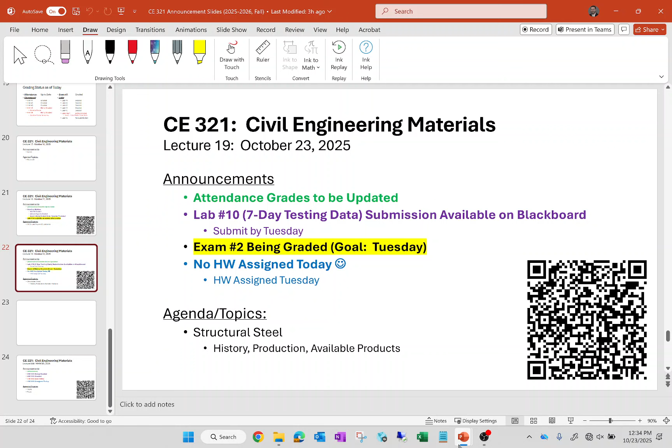Steel is a definite area of passion of mine because I've been a structural steel researcher basically since I was in my early 20s. I've been doing this for a while. I could talk about steel all day long, but I'll try and restrict my discussion to the key bullet points. So I'll talk about the history of steel a little bit and how it's produced. But mainly I think you need to know the context, and you need to know the products that are available. So let's talk about steel.

Steel is an incredibly common construction material. It's probably our third most commonly used construction material in terms of weight and volume, because concrete and asphalt, obviously, we just use higher volumes of those than we do steel. But steel is one of the most versatile materials that are out there.

One thing that's a little different about steel, at least from an engineering specification standpoint, is that concrete is a material that's designed. Soil, aggregate base, asphalt, etc. - those are materials that are designed and specified. Steel, not so much. You're just sort of buying it from the supplier. So really what's most important is that you understand steel's properties, and that you understand the products that are out there. It's not like concrete where we need a long discussion about how to proportion a mix design. You're just picking what's available from a manufacturer or a supplier.

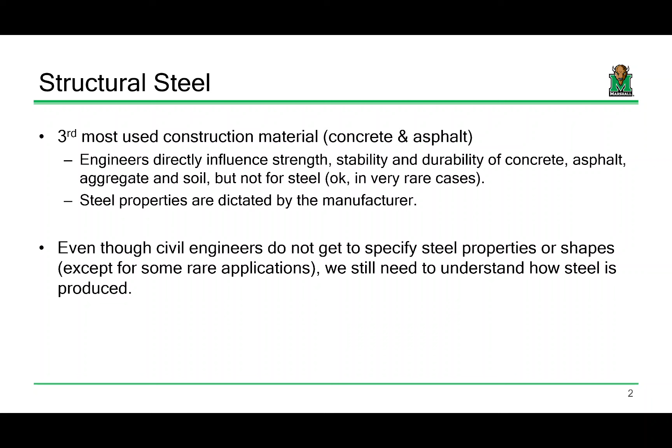So why steel? Why would you use steel for a given project? Number one, steel is an incredibly strong and stiff material, with a really high strength to weight ratio. Steel is a really heavy material - we talked about how concrete weighs usually on the order of 140 to 150 pounds per cubic foot. Steel weighs almost 500 pounds per cubic foot. If you have a cubic foot block of steel, it weighs 490 pounds of structural steel. That's heavy.

So steel is definitely heavier than concrete, but for that order of magnitude increase in weight, you get an even higher order of magnitude increase in strength. So even though steel on a per cubic foot basis is heavier than concrete, because it exhibits so much more strength, steel structures are lighter than concrete structures. If you look at a structural steel building frame, like this building we are in right now, the frame is a structural steel frame. If this building were made out of reinforced concrete, it would be a much heavier building.

There are a number of real considerations that you need to account for when selecting materials like that. For example, the heavier the building, the beefier the foundation support structure needs to be. The heavier the building, the more it can affect the dynamic characteristics of the building, which can be important in earthquake-prone zones. That type of thing is stuff you need to take into account.

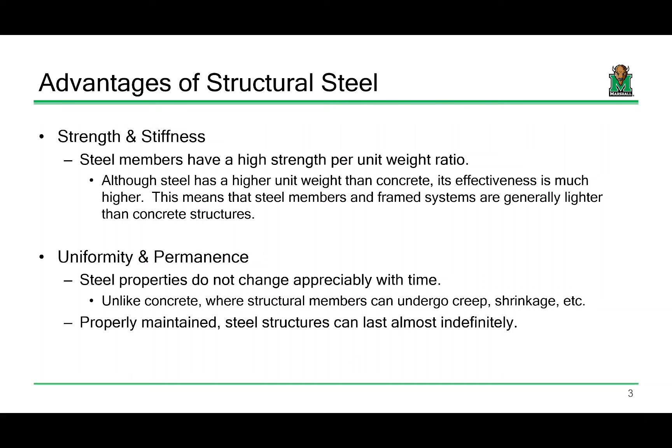So you don't really have to worry about time dependency. From a material standpoint, steel is a pretty easy material to design with. It's also an incredibly ductile material. Ductility is a characteristic we're interested in whenever we need to design systems where we expect a lot of inelastic deformation - building design for earthquakes is a big example. One reason we use alloys like steel in car frames is that under car crashes, we can absorb a lot of that energy into the steel elements, having the steel absorb the damaging energy and not the person. So steel works very well in that regard.

Nowadays, I'm going to talk about the two different ways that we produce steel, but nowadays steel is surprisingly sustainable because most of the steel we produce for the construction market is recycled. We're not actually producing raw new steel like we used to - we did, obviously, but now what we're doing is melting old steel and reforming it into new products.

About 98% of the steel in a building can be recycled into new steel, so we're really able to stretch that quite a bit. There's a term called mini mill - nowadays we're melting old steel into these mini mill operations. All we have to do is change the chemistry a little bit, and boom, we've got a new product.

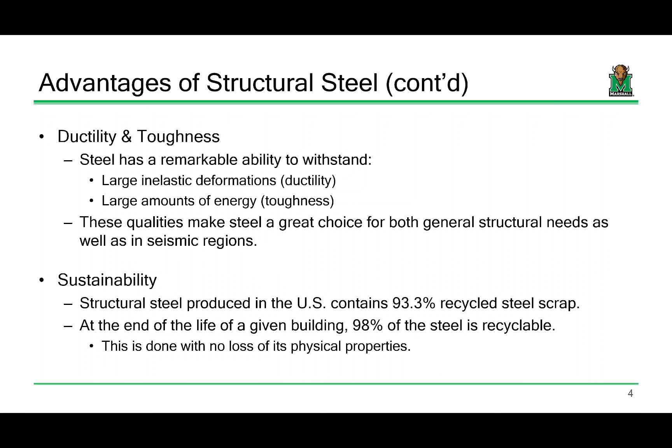A little bit on the history of steel: it was first used in Europe. This was a railroad station in Paris - this was the first really major use of it. You saw it used in Paris and London. There was a pretty famous structure built in Paris, which I'm going to show some pictures of here in a bit.

One of the things steel did is it allowed buildings to be taller, because it has a high strength to weight ratio. Steel is one of those materials that allows buildings to get taller and taller. But for a long time there was sort of a ceiling - a point where we weren't going to build anything of significant height because we were waiting on a particular invention to make tall buildings much more effective. So what invention do you think really made tall building design possible?

Ladders? You're on the right track, but that's not right. What is a ladder used for? Getting up to height. Okay, so what's another way you can get up to a higher floor in a building? An elevator, right?

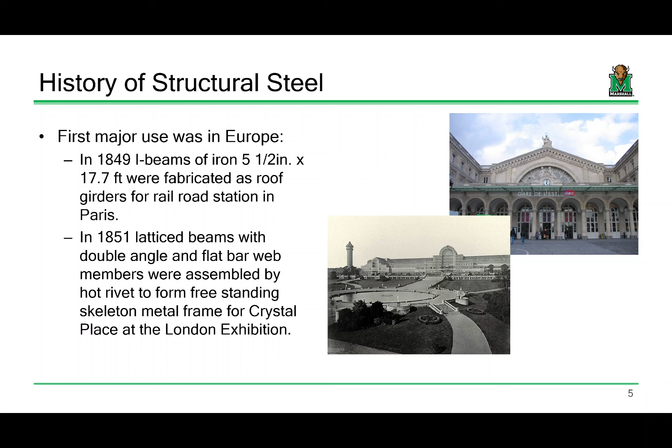So what you found is that in America, around the 1880s, you started finding tall buildings being erected. The first tall building was in Chicago - it was the Home Insurance Building. In 1890s, Chicago was really famous for its high-rise steel buildings. In fact, the American Institute of Steel Construction is based in Chicago - have y'all seen the Steel Manual kids carrying around? They publish it there in Chicago, so they kind of have a home there.

But really, it was the elevator that made tall building design effective. Once you had an elevator, you could start making buildings really tall, because now people could actually access the higher stories and not be exhausted going up the stairs.

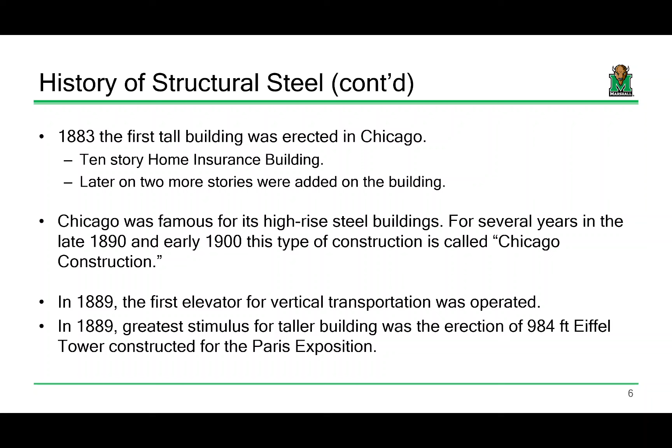Things got a little nuts in the late 1800s when this thing got erected - this guy named Kyle right there, he's a dork, that was me in grad school. That's me at the Eiffel Tower. That thing is massive, I don't know how to characterize just how big this thing is.

It's insane. I don't know if you can see this, but this is me really zooming in on some sections of the tower - see these folks right here? I was in Paris, and there was some big summit, like a G20 summit, with dignitaries and foreign ministers and secretaries of state from various countries meeting in Paris at the same time I was there. So they had all these French federal agents scaling the tower, making sure there were no incendiary devices or anything like that. It was kind of nuts. I wasn't there very long, only for a couple of days, but...

It was a great trip. If you ever get the chance to go to the Louvre, go to the Louvre - you get lost in that place, it's huge. But that was an interesting juxtaposition.

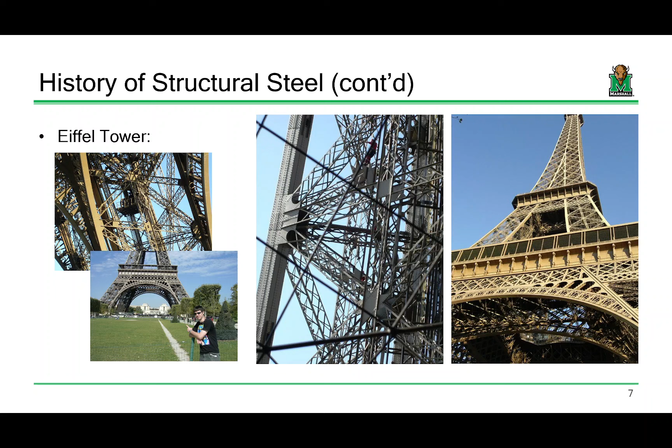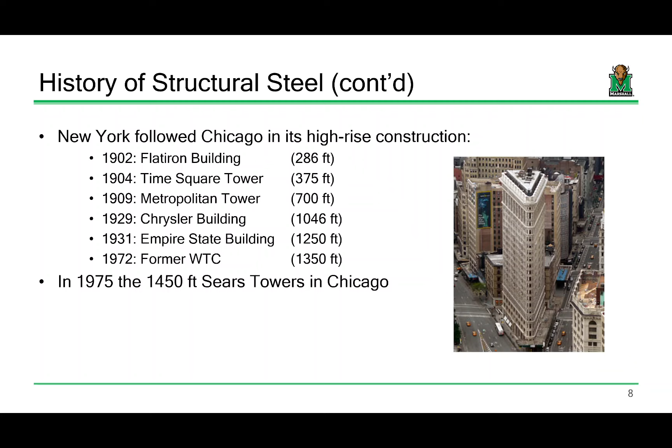So after that, New York started to say, okay, we can build tall buildings too - you've got the Flatiron Building, Times Square, Chrysler Building, Empire State. In 1975, the Sears Tower got erected, now the Willis Tower, and you can take it from there.

I don't want to say much more about the history of steel, because what matters more is the production of steel. There are two approaches we use: the basic oxygen furnace approach, where we generate raw steel, and the electric arc furnace approach, where we're melting old scrap to turn it into new steel.

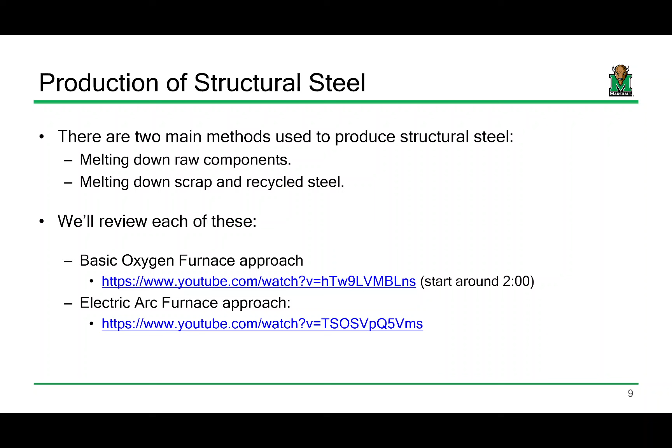The steel making process is essentially feeding in three raw materials: iron ore, limestone, and coal. The coal generates the heat necessary, along with the carbon content, to generate your raw pig iron, which you can then cast into steel.

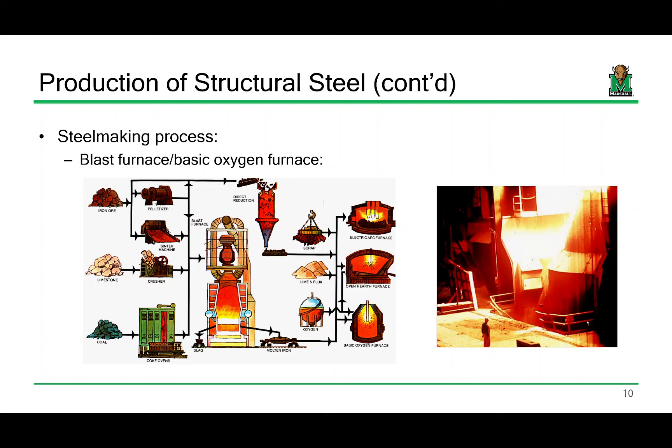If you ever get the chance to go on a tour of a steel making facility, it's really worth going, because it's wild what they're able to do.

That diagram distills this into a three-step process. We reduce the iron ore to pig iron, then we take that and refine it into steel. I'll show you some of the additive compounds we use to adjust the chemistry of steel, like a table of how vanadium or nickel affects the chemistry. Once we have molten steel, we form it into products, and that product forming is what I want to focus on later.

Step one: we take the raw iron ore and heat it in a big blast furnace with coke and limestone. Each serves a particular purpose - the limestone shaves off the impurities in the mix. If you've seen steel produced, you get slag, and you scrape that slag off. That's where all the impurities go.

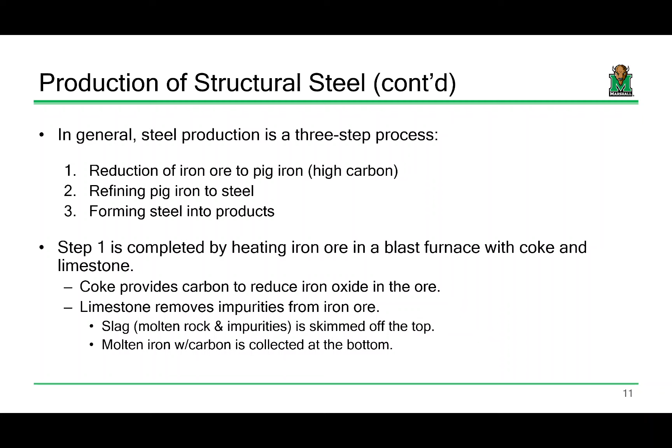The big thing when producing steel is you want to reduce oxygen in the molten metal - that's the one thing you really want to reduce. You also want to reduce hydrogen, which becomes more of a challenge when welding - we'll talk about that later. But getting that oxygen out is a big goal during production.

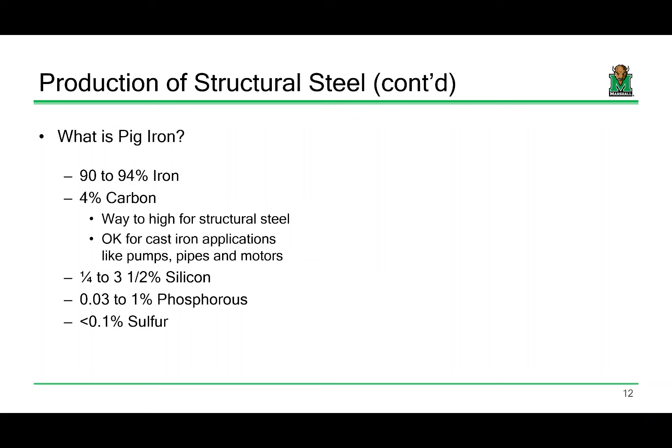Pig iron is mostly just iron with a little bit of carbon in it. You might find trace elements of silicon and sulfur, which are detrimental to steel behavior, but they're there - you just have to control them.

This process is what we do to control the metallurgy. This might seem counterintuitive, but we introduce oxidation into the mix to remove impurities. We also, in a ladle metallurgy furnace, control the chemistry of the mix by introducing things like vanadium, nickel, etc.

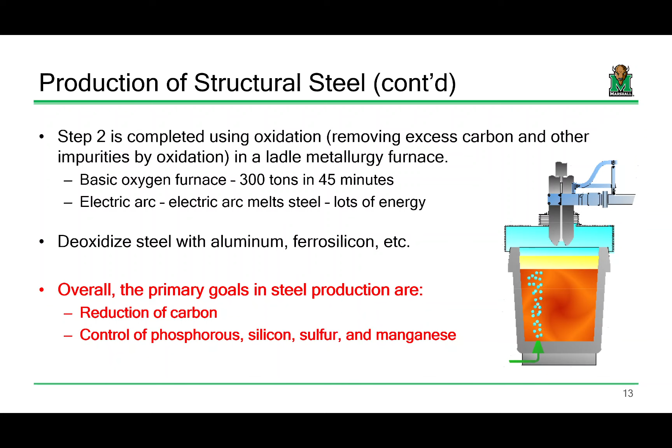One job I would never do is at this stage you have to collect a sample of the molten steel. There's a guy with a big flame retardant suit going and drawing this sample. I'm like, no, I'm not doing that - that looks terrifying, no thank you. I think that's in one of the YouTube videos I linked. But yeah, I'm not doing that, that seems very dangerous. It's probably not, but it just looks it.

In general, the steel process is done the same way, but there are variations of steel, variations of grades. There's low carbon steel, mild carbon steel, stainless steel, and all that. What really changes the grade of one steel to another are alloying agents.

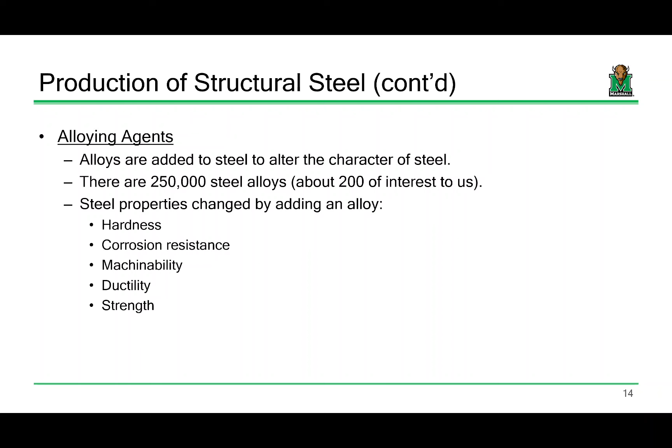Let me find it on this slide - there we go. If you ever go to a steel mill, particularly a mini mill, it's kind of shocking how small these piles are. I went to this mini mill in Muscatine, Iowa, and the steel mill was located right on a rail line. Rail cars would come in daily with carloads full of scrap - old cars, old construction equipment, railroad scrap, you name it.

They melt all this steel, taking different steel from all these different sources, creating a big melted pot of steel, and say, okay, we need to generate A572 grade 50 steel. This facility is like a mile long - it's huge, massive, twice the size of Marshall. And then you ask, okay, well how big is their nickel pile for the whole facility?

It's kind of nuts how little material they really needed in order to control chemistry. It's really kind of amazing. They literally had piles of aluminum to throw in the mix, a pile of copper, a pile of vanadium, and so on. Each of the different alloying components provides different characteristics of the steel.

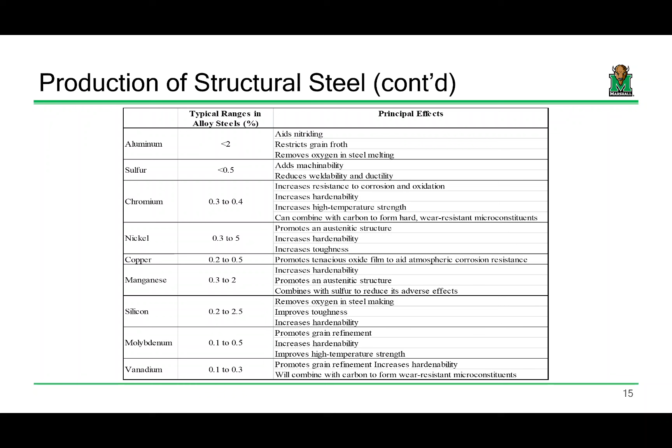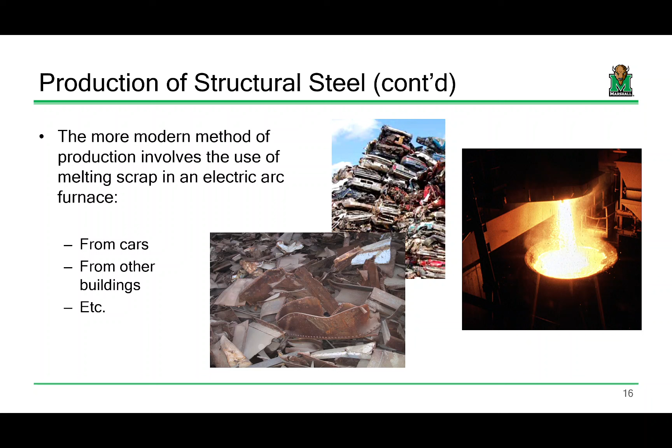The more modern method, which is really what I want to focus on because this is what you find getting done more and more often - I know the Nucor facility we're getting ready to build in West Virginia is doing this too - is melting scrap. That scrap can be things like other cars, other buildings, construction equipment, rail line, just any old steel. They take that and put it in a big electric arc furnace, melt it, and then draw a sample.

They draw a sample, check the chemistry, throw in a few alloying agents if necessary, and then begin the casting process.

One thing I thought was really crazy: I was at a steel casting facility in Iowa. In the casting process, you can produce ingots, which are discrete blocks of steel that can then be rolled into other products. You can also do continuous casting, which is a popular means of generating plate stock. The idea is that there's a continuous line of a slab of steel that gets produced.

What they do is, there's this ladle of steel. They open the bottom, the steel starts flowing out into a dish called a tundish, and from the tundish it flows into the mold. The reason for that extra step is so you get a continuous flow rate into the mold.

But the cool part is they have this tundish so you get a constant flow rate into the mold, but there's a gap, a section where the molten steel is exposed to air, and that's not good. For that little section where the steel is exposed to air, it's not like a volcano—it's flowing at a very slow rate.

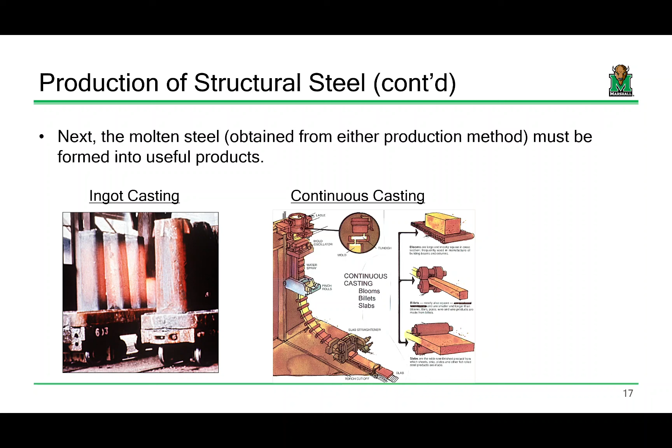Now, whether you have ingots or a continuous cast slab, what you then have to do is take that section and form it into a final product. I'm sure you've heard the term rolling steel, or a rolled product.

The easiest one to wrap your head around is a plate. So let's say you're forming a plate. You start out with a block of steel, maybe this thick, and you want to essentially squish it, almost like Play-Doh, into the thickness you're interested in. You run it through high-pressure rollers that squish the steel every so often until you get to your final desired thickness.

One interesting thing is that when you do rolling, you roll in odd-numbered intervals. The steel comes this way through the mill, into the rolling section. You want an odd number of rolls—let's say 5—because you want to roll it back, roll it, and then shoot it off to the next destination. You always want an odd number of rolls so it continues onward instead of going back.

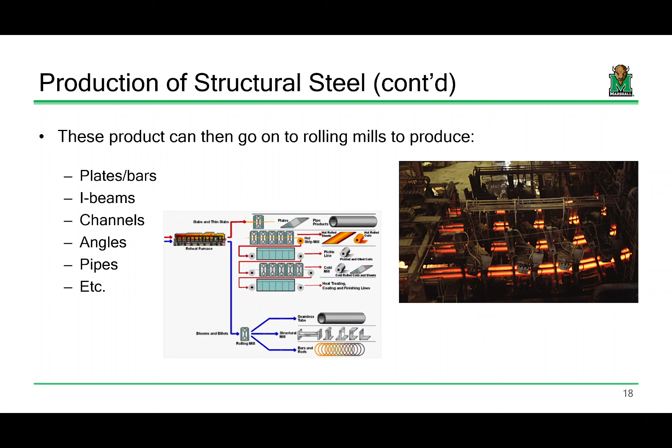You don't want the steel going back into the mill—you want it going out to the storage yard. So you always have an odd number of rolls. Plate stock is just taking that plate and squishing it down. If you're generating something like an I-shape, a channel, or an angle, you've got multiple rollers pushing it this way and that, squishing to generate an I-shaped cross-section or an angle, etc.

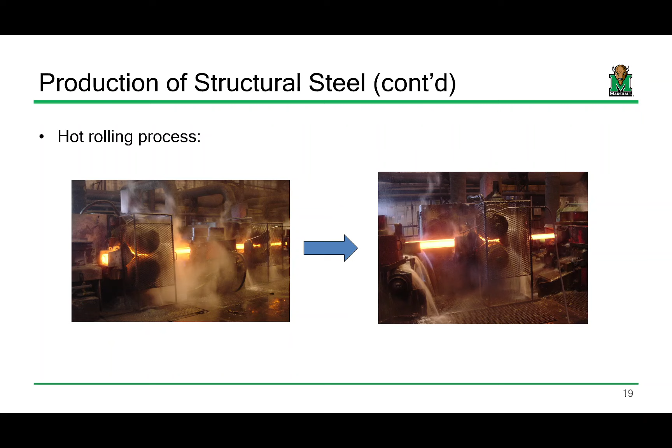This is what it looks like passing through the rollers—it's a really steam-heavy event. You can see these rollers, and all this water here is cooling the elements. The steel is red hot, and it's taking that shape and squishing it down into the final cross-section. Steel production has become such a science that you can produce these things down to very exact dimensions.

Okay, so let's talk about the products.

So as steel designers, as structural engineers, you're going to be primarily dealing in structural shapes, as well as fabricating shapes like plate girders, for example, out of plate stock, out of bar stock, et cetera.

When you're working in steel, you're essentially picking a steel grade for a given application, and I'll show you what I mean here in a second. The way that we grade steel, we're essentially looking at two things: the chemical composition, which differs by grade—different percent carbon, different alloying agents, et cetera—but really, as structural engineers, what we're interested in is our mechanical properties. We want to know the yield strength, the tensile strength, what's the Young's modulus, et cetera.

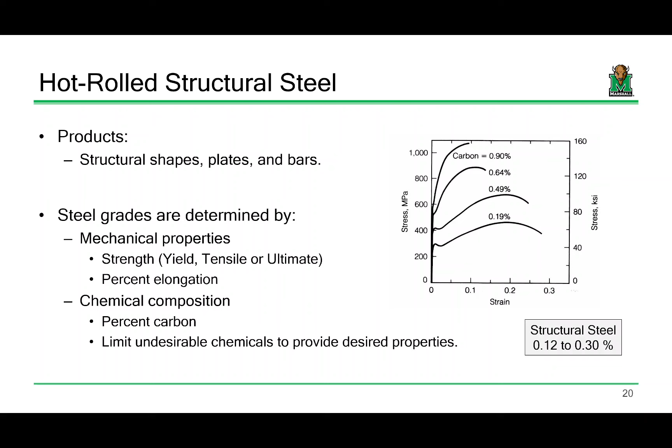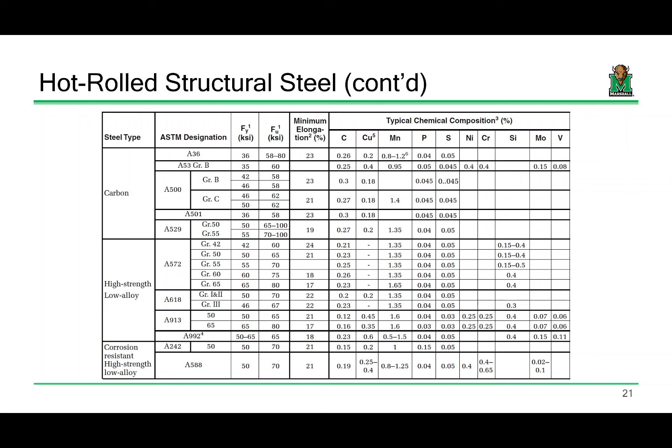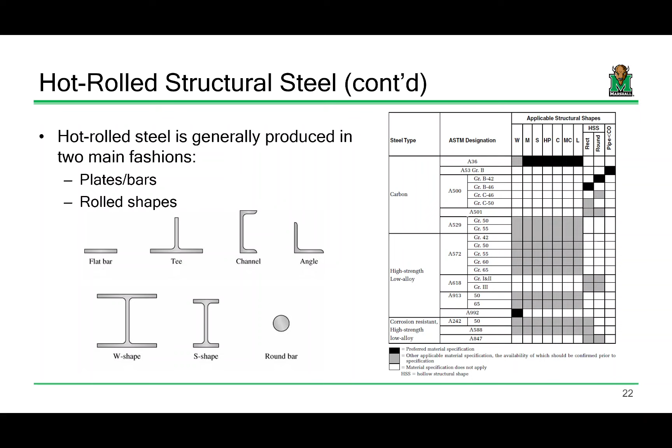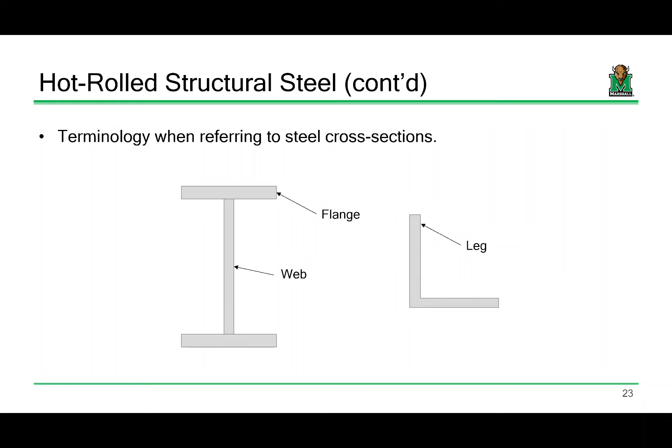But the most common I-shaped cross-section we use is a W shape, and I think I mentioned this in structural analysis for the class project. So W shapes are really what we're using. The W stands for the fact that the flange is wider in a W shape than a traditional I-beam. Speaking of, whenever we're looking at a steel cross-section, this is the flange, that is the web, and that's a flange too - they're both flanges. So flange, flange, web. This is a leg, that's the other leg. So if you ever hear me talk about the leg of an angle, that's what I'm talking about, or webs and flanges, you kind of see what's going on.

When we designate steel cross-sections, we have a naming convention. I think I already talked about this in structural analysis, but just as a refresher: if I mention a W21 by 93, the W refers to the fact that it is a W-shaped cross-section, a wide flange. The 21 is about how deep it is - you all have the sheet from the manual for the W12s, they're not all 12 inches deep, some are 12.1, 12.2, 11.8, etc., but they all come from the same rolling schedule, so they're all within the same family of cross sections, about 12 inches deep. The 93 is its longitudinal weight, meaning it weighs 93 pounds per foot.

And we pretty much classify every cross section that way except for angles. Angles, if I say 6 by 4 by 1/2, the two legs are 6 inches by 4 inches respectively, and the legs are 1/2 inch thick.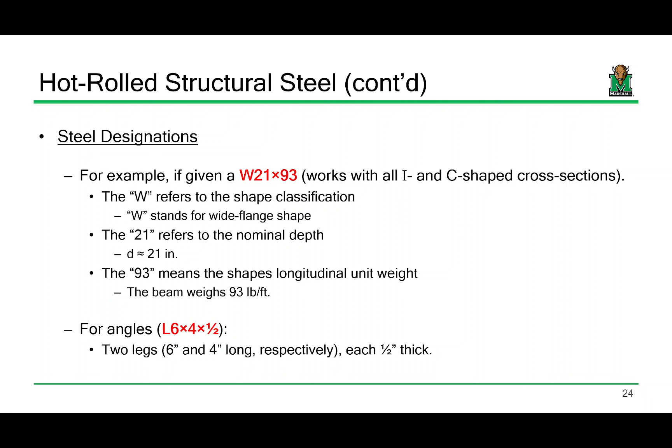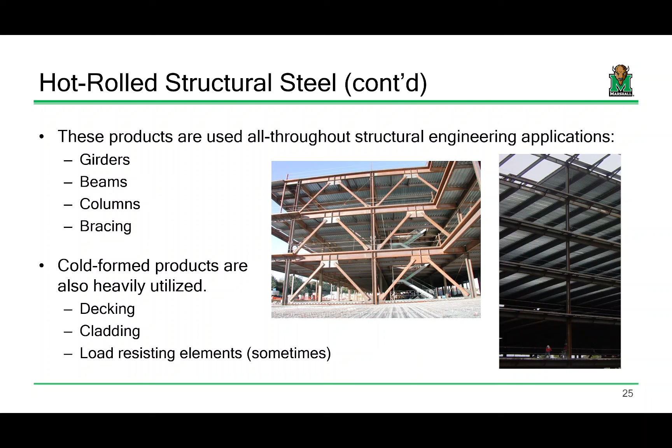And we use those products all the time. I'm not teaching steel design next semester, but I'm probably teaching it the following semester. We use those products ubiquitously in building design, frame design, you name it, all the time. It's a pretty ubiquitous product.

Has anybody ever heard of cold formed steel? So if you haven't, cold formed steel is when you take a lighter gauge product—by lighter gauge I mean thinner thickness—and instead of the steel being really hot when you roll it into a final cross section, you're using high pressure rollers to plastically deform the cross section into a desired shape. Cold formed steel has these Z-shaped cross sections and channel shaped cross sections, etc.

Probably the most common place you might have seen cold formed steel—how many of y'all have been to Sam's Club or Costco? You know the aisle where they have the big pallet of grape jelly? And there's those posts that hold everything in, those big steel posts—that's cold formed steel. Those are elements and whatnot.

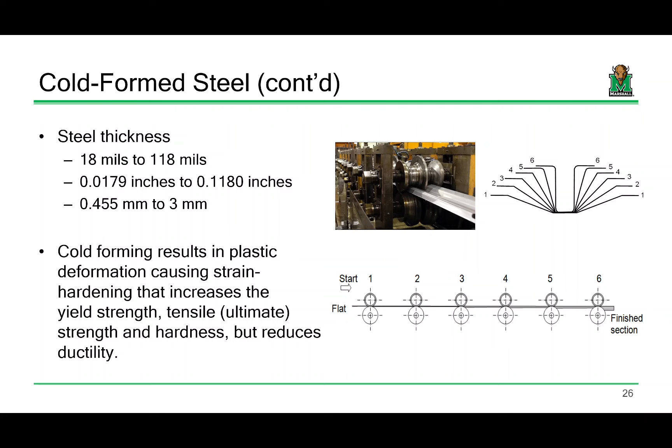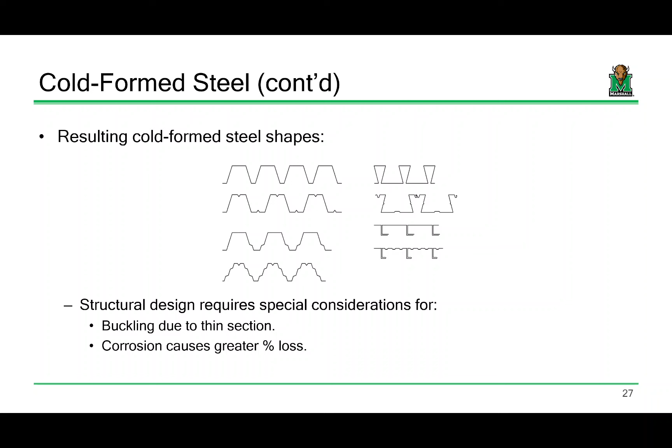You can get some really bizarre cross sections with cold formed steel, but it's nice—you see it in building design when they're trying to lighten the structure, so you can really get reduced weight. But cold form has buckling issues. There's a lot going on there with buckling, is all I'll say. They can have very quirky stability issues, so it's like a whole science in itself, just understanding the buckling of cold formed steel. And they're also thinner, so if they corrode, it's a bigger problem. So you'll see cold formed steel galvanized or painted quite a bit.

Okay, let's talk about fasteners. One thing we don't use today anymore are rivets. You will see rivets utilized in older structures, and if you're doing a rating project for the DOH, you might have to predict the strength of currently installed rivets. There are methods to do it, and they are way conservative. But we don't do riveting anymore because rivets are time-consuming, pretty dangerous to install, and when you actually start looking at the strength from rivets, they're pretty difficult to predict. So we just don't do riveting anymore.

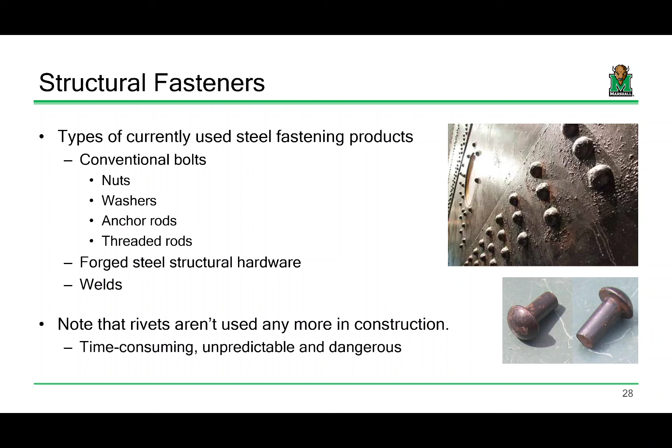Really all we do is bolting and welding. As for bolting, we typically use two common grades of bolts: either an A325 or an A490 for large-scale structural applications. A325s are probably a bit more common. 490s are a little more expensive, but they're a higher grade, so you end up using less of them. So it can be kind of a trade-off depending on the structure you're looking at.

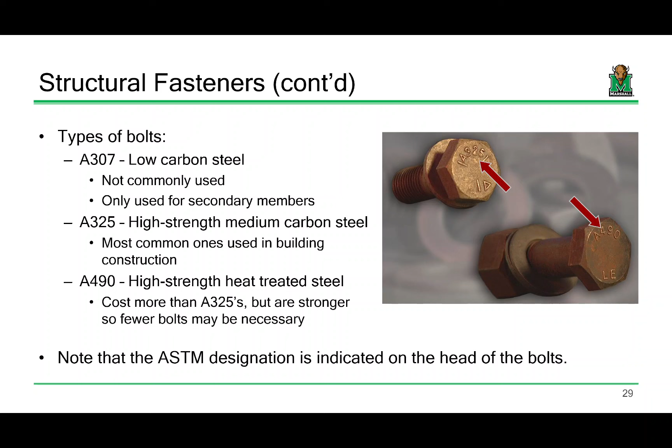Whenever you see an A325 or an A490 bolt, you'll see designations—this is the ASTM spec that it's meeting. And then you'll also see a stamp on the bottom that indicates the manufacturer. So these were manufactured, for example, by Lejeune—that was the manufacturer of those bolts and whatnot.

Whenever you design with bolts—and I'm getting into CE 414 land a little bit, into steel design land—we have to design considering that if you take a bolt, stick it through a plate, and yank on the plate, either the bolt fails or the plate fails. So you have to actually assess both limit states.

There are also two different types of connections that we class together: bearing type connections and slip critical connections. Bearing type connections are when the bolt goes through the hole and you're just relying on the strength of the bolt and the strength of the plate. But a slip critical connection is one in which you're relying on the friction generated between the two plates. If I stick a bolt between plate A and plate B and tighten it, those plates get sandwiched together.

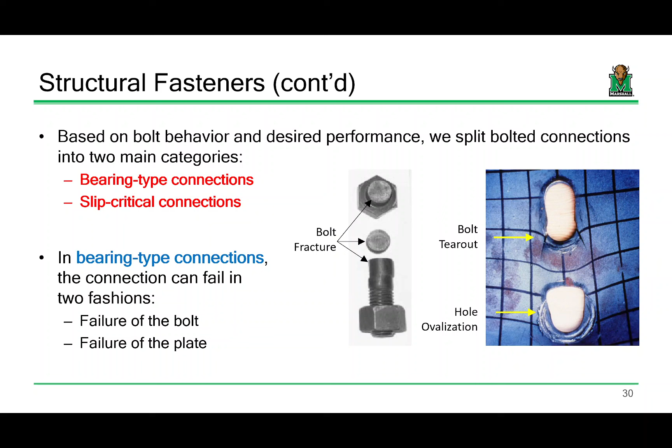And if I take those plates and yank on them, I'm going to get a friction force developed between those two plates. Remember that from statics? Like if you take a coefficient of friction times the normal force, you get friction in between. You can count on that friction in order to design—we call it a slip critical connection.

You tend to use slip critical connections in areas where you have cyclic loading. A good example of a place where a slip critical connection is installed is a bridge. You will see bridges utilizing slip critical connections almost universally.

So the example I like to use: how many of you have ever run a lawnmower? Imagine there was a bolt that was a little loose on the lawnmower, and you started it. What would happen over time as the lawnmower's running? What would happen to the bolt? It would loosen and fall out, right? So in a structure undergoing that vibration, you have a desire to make sure that bolt is a little bit more than snug tight. You really want it on there so that doesn't happen.

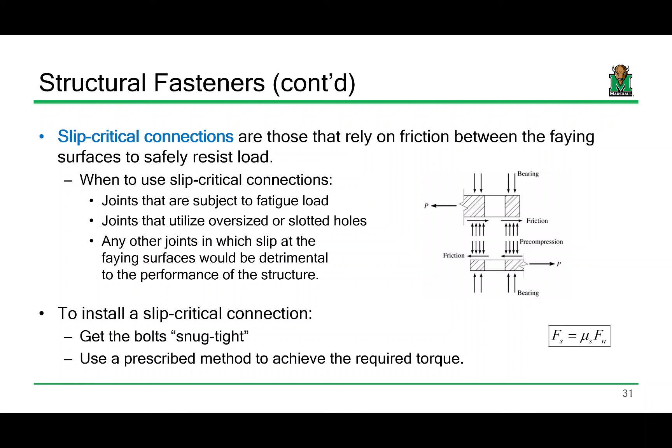Well, in the case of a bridge, it's not vibrating as quickly as a lawnmower, but you do have a bolt that you want to stay on there for 75 years as traffic is going on it every day. So there's a couple of different ways that you can do that in the field. First, you have to get the bolt snug tight, which you can do with an impact wrench or just using a spud wrench.

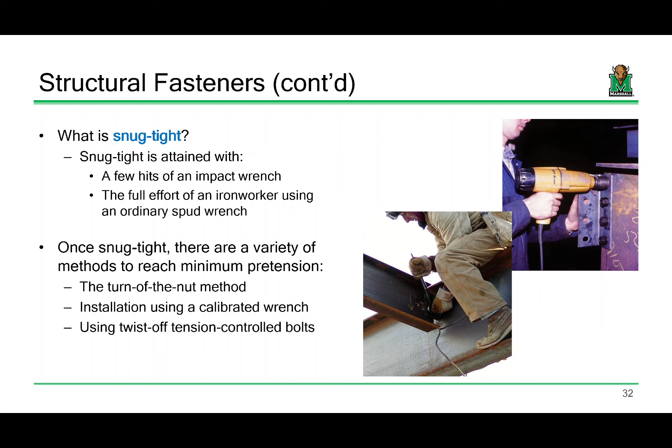A couple of the slip critical methods that you'll see: number one is called turn of the nut. This is sort of a classical, simple way of getting that required pre-tension for a slip critical connection.

How many of you have ever been on a bridge project where they're building a steel bridge? I'm just curious, has anybody ever been on one? Did you ever see these where they were marking these little marks on? You didn't see that? Okay, I'm curious, did you see either one of these on the site? How about bolts that look like this? Okay, these are starting to get to be more common. I knew I was going to hit one of them.

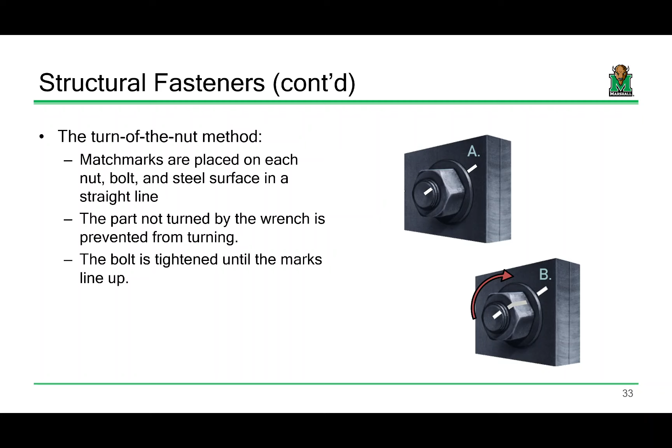This is an older method where once you get the bolt snug tight, you mark match marks on the bolt, the plate, and the nut, and then you turn it past snug tight a specified number of turns, maybe a third of a turn or half a turn, until they line up. That'll get you the appropriate amount of torque in the bolt to count on it for that friction. Another way is to use a calibrated wrench.

So you'll see on the site, maybe this mounted on a beam or a column. This is called a Skidmore Wilhelm. It's basically a super duper hyper accurate bathroom scale. You stick a bolt through this, and the idea is that you would use a calibrated wrench that would get you that pre-tension, and you just use that wrench for slip critical installation.

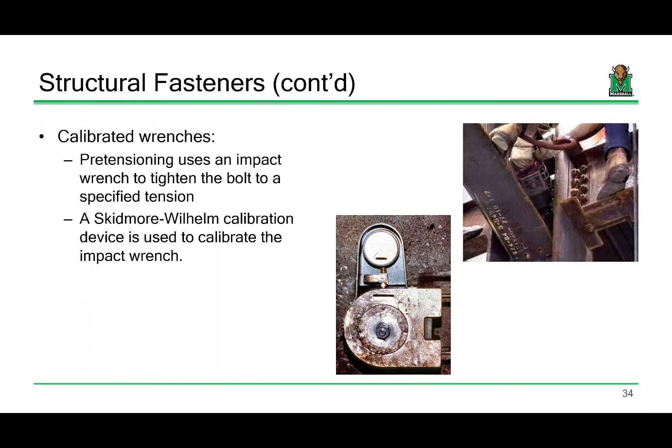It's a little bit annoying though, because if you ever put the wrench down, stop using it, go have lunch, or have a smoke break, then come back and start using the wrench again, you have to calibrate it again. So it's kind of annoying.

These things are pretty slick, and they're getting to be a little bit more ubiquitous. They're a little pricier, but this is what's called a twist-off control bolt. They're kind of neat because notice how the end of the bolt is rounded, so you only have to tighten it on one end. The wrench you use grips both the nut and the bolt at the same time, and it will twist them in opposing directions. Once you hit that specified pre-tension, this little nub, this splined end, just sort of chucks off.

So you'll see, like this is the connection, and you can see these bolts haven't been tightened, but this one has because the little nub's been chucked off. It's kind of nice for inspectors because all they have to do is see that all the splined ends are chucked off and they know all the bolts meet the specified pre-tension.

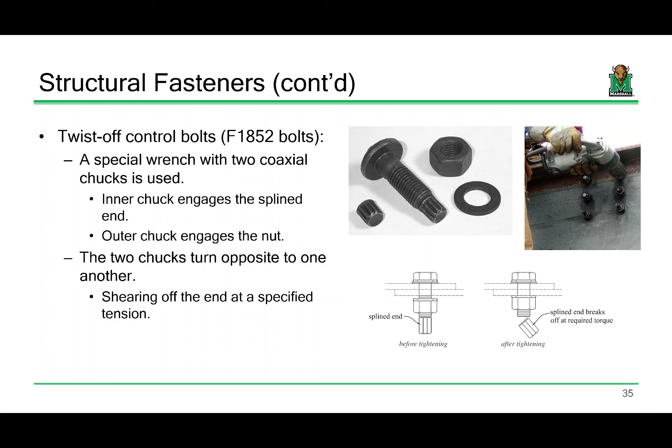So that's what they used? Okay, I knew they were going to use one of them.

Okay, I'm curious, how many of you have ever welded before?

I'm bad at it. I can get piece of steel A to adhere to piece of steel B, but welding is difficult. If you've never welded and have the opportunity to try it, I genuinely think you should, because as an engineer doing structural design, you might be specifying welds. It's worth having that underlying knowledge and respect for welders, because it is difficult. It takes a lot of skill to develop welds.

The most common weld that we use in structural engineering is a stick weld. The technical term is shielded metal arc welding.

Whenever you weld, what you're doing is not gluing piece of material A to piece of material B. You have this weld machine with an electrode, and on the other end it's sort of like a big jumper cable. You connect that to one end of the workpiece you're welding, and the electrode's connected to the other end. Once the electrode comes into contact with where you're depositing the weld, you complete the electric circuit, electricity starts to flow, and you start consuming the electrode. That generates a lot of heat, and you create three molten pools of metal: piece A, piece B, and your electrode.

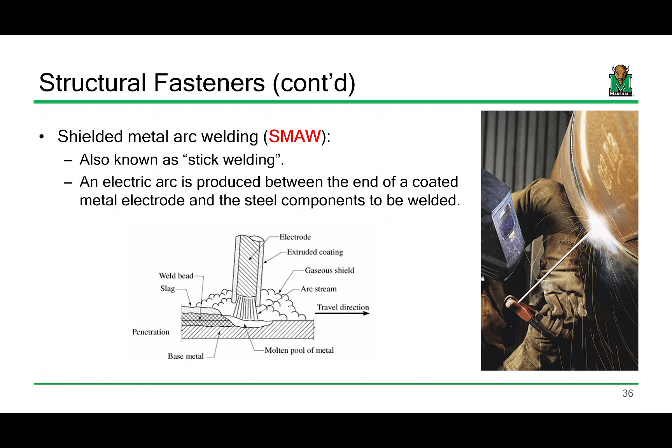It all cools, it all solidifies, and you have a welded joint. Stick welding, if you ever see the electrode, it's this electrode wire coated in granular flux, sort of a granular mess. That granular flux protects the weld from hydrogen embrittlement. If there's hydrogen in the atmosphere and it gets into the weld, you get a brittle weld, and that's no good.

MIG welding is probably the next most common. I'm curious for those of you who weld, stick weld or MIG weld? Stick. So everybody tells me they think stick welding's easier. I think MIG welding's easier, but I don't know, that's just me.

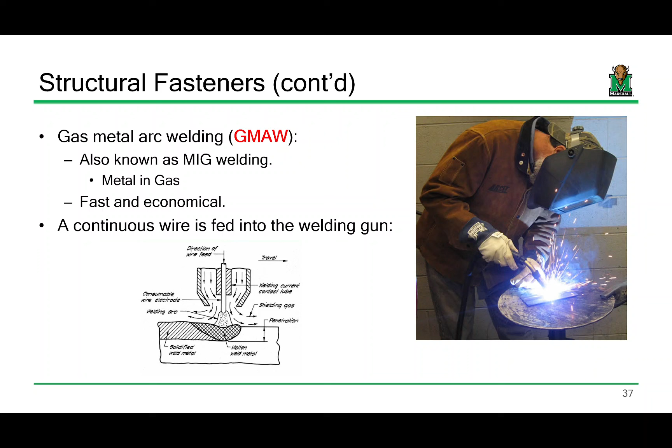With MIG welding, instead of having a single electrode, the electrode is fed continuously through the welding gun. When you click the trigger, not only are you depositing electrode, but you're producing an inert gas that shields the weld from hydrogen embrittlement. Stick welding gets you a deeper weld penetration and a stronger welded joint, so MIG welding will only get you so far, which is why it's not as common in structural applications.

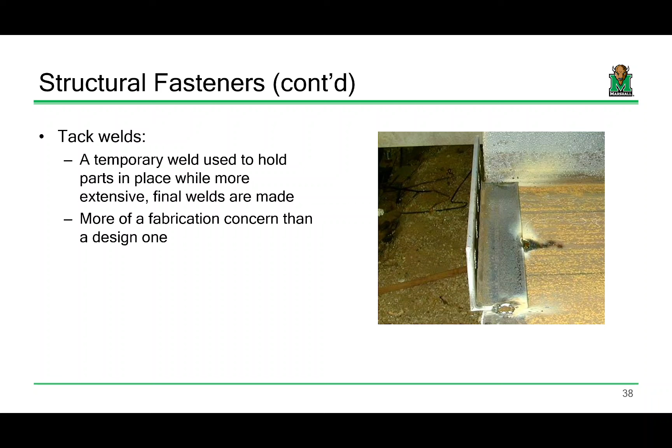The most common weld that you deposit is really a fillet weld, but you always start with a tack weld. With a tack weld, you get your piece where you want it, hit it with a couple hits of the tack weld to get it positioned, measure it, and if it's aligned incorrectly, you can grind it off a lot easier than if you'd placed the full bore weld from start to finish.

The most common weld we deposit, though, is a fillet weld. A fillet weld is basically depositing a single bead of weld along the connection of two plates, joining them together. Probably 85 to 90% of all the welds we deposit in civil engineering are fillet welds. They can be continuous, or done in intermittent discrete passes, which we might call a stitch weld, but it's all fillet welds.

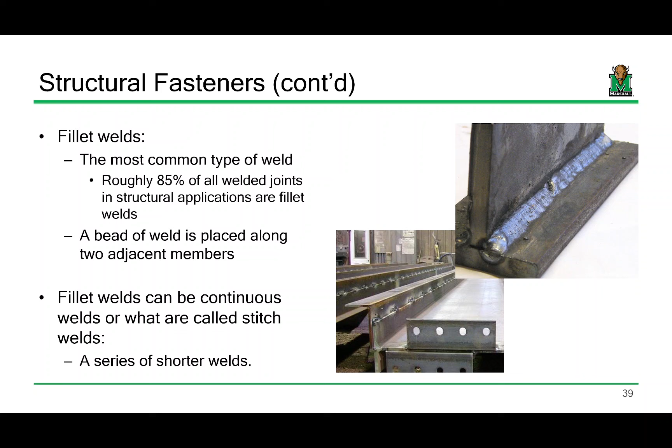The other most common type is a groove weld, where you're basically filling the gap between two plates, completely joining plate A and plate B. With groove welds there's not really a whole lot of design, you just specify them, but it could either be a CJP weld or a PJP weld.

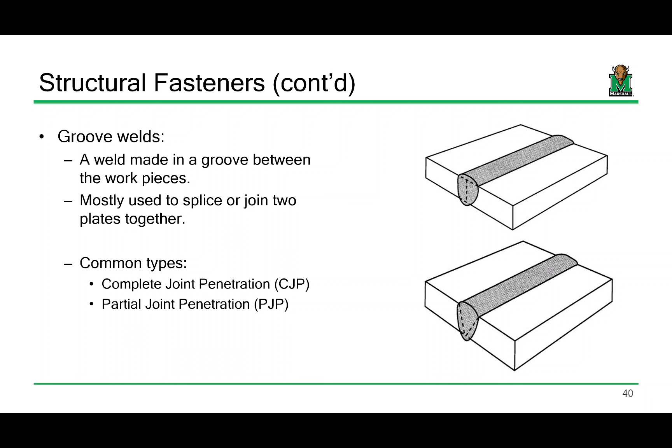Okay, rebar. Rebar, and reinforcing steel in general, is one of the most common products we use. Rebar is probably the most ubiquitous. We also use welded wire fabric for things like shear reinforcement, or in slabs for temperature steel.

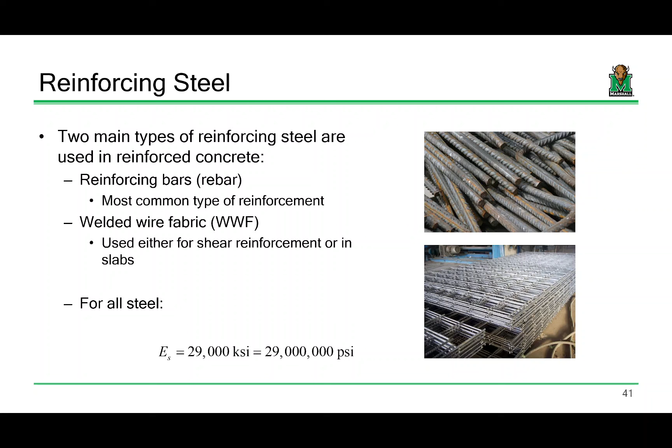The most common grade of rebar is grade 60. You can have grades like grade 40, grade 50, maybe grade 80, but grade 60 is the most common grade of rebar.

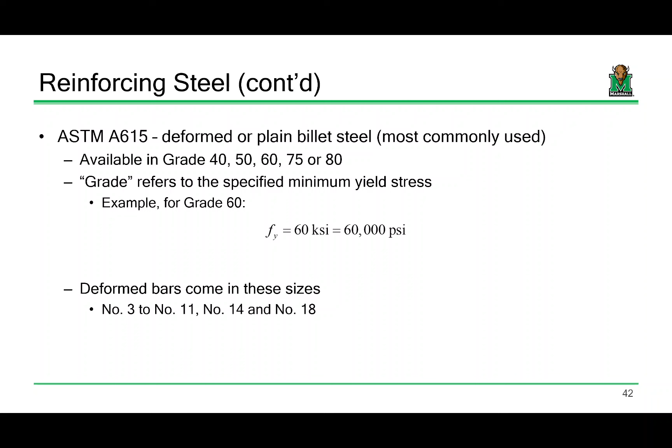I'm curious, have you ever been in a class where they talk about rebar sizes? Has this ever been brought up before? If I mention number 5 rebar, does anybody know how big that is? Never heard that? Okay. Number 5 rebar has a diameter of 5/8 of an inch. Rebar comes in several defined sizes, so I want to explain those.

This is something that's actually pretty important. If you take reinforced concrete design, Dr. Zatar will burn this into the back of your memory, I promise he will. But whenever you spec out rebar...

For rebar from a number 3 to a number 8, the diameter is that number divided by 8. So if it's a number 7, the diameter is 7/8 of an inch. If it's a number 5, it's 5/8 of an inch. That's the diameter; pi d squared over 4 gives you the area.

A number 9 is a little special. A number 9 bar has an area of exactly 1 square inch, so its diameter is a little bit bigger than normal, because pi times that diameter squared divided by 4 equals 1. So the diameter is a little bit bigger.

Number 10 is a quirky one. A number 10 is a bar where the diameter equals the area numerically. So it's a 1.27 inch diameter and a 1.27 square inch area.

Then a number 11, number 14, and number 18 are just really, really big pieces of rebar. It's equivalent, so a number 18 is like a 2 inch by 2 inch bar, a number 14 is 1.5 by 1.5 inch, and a number 11 is 1 1/4 by 1 1/4 inch. They're really big—we don't use those very often.

But this is a very common thing that you'll see in reinforced concrete design. That'll be burned into the back of your memory, I promise that.

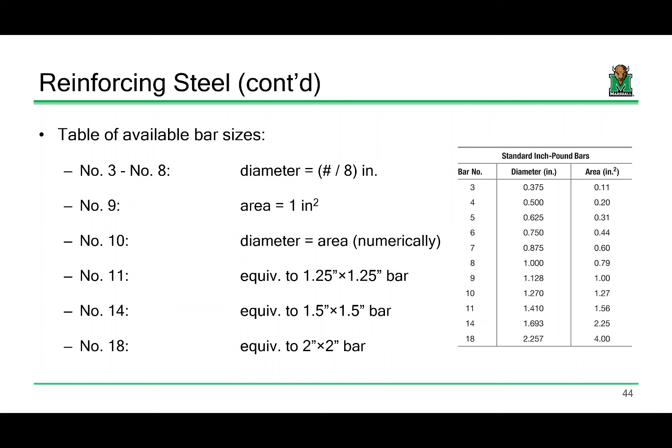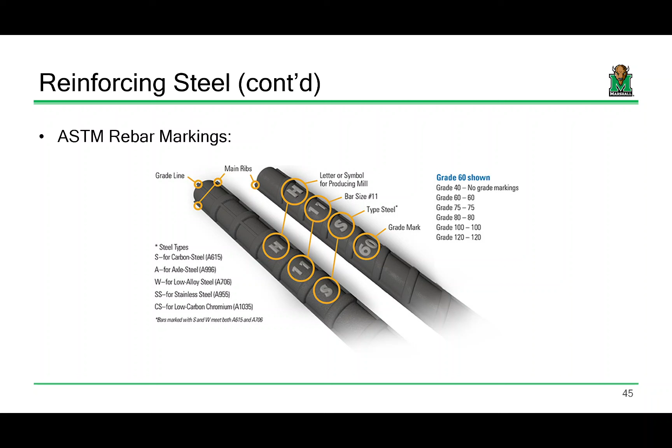If you ever see a piece of rebar, you'll see several markings on it: the grade of steel, and the type—is it carbon steel, is it axle steel? Most of it will say S. You'll also see the number, so if you see the number, you'll know the diameter. This would be number 11 rebar. And then that's just the mill and whatnot that produced it.

Okay, I think that's it—what else do I have? Did I get through all of it? Well, okay, I'll be quick.

All right, so we have our welded wire fabric. The only thing I'll say is you'll see this used in slabs and buildings a lot. What they'll do is have rebar serve as the mechanical structural reinforcement, but lay a layer of this right on top to prevent shrinkage cracking and temperature cracking. It works really well for that. It also works really well for shear reinforcement in walls and things like that, because it's just on a per square inch basis.

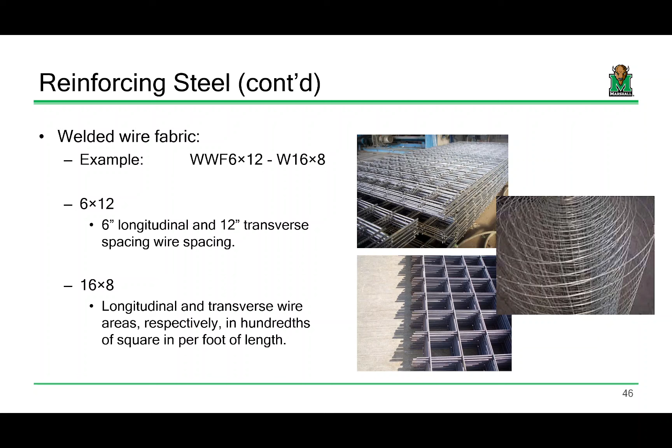If you're ever doing a pre-stressed bridge—I think I talked about pre-stressed earlier—pre-stressed does not use regular old steel. It uses a specialty pre-stressing strand product that can get really, really high capacities, we're talking like 270 KSI. They're really, really specialized products. I'll probably talk about that a little bit more next week when we start talking about tension testing.

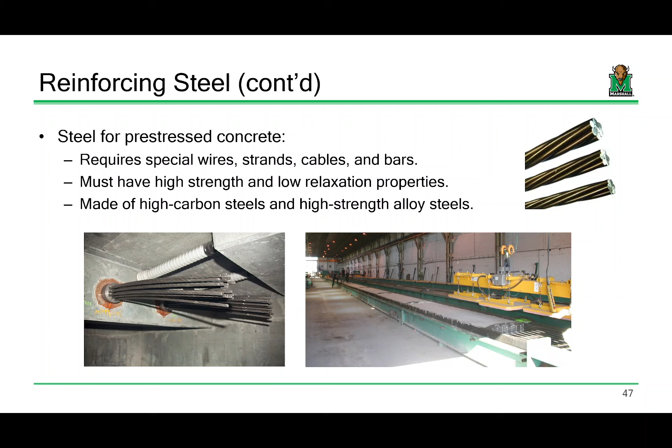I know this has been a very content-heavy lecture, so I'm going to end it sort of right here. But I want to set the stage a little bit for next week and what we're going to do on Tuesday.

Next week, what we're going to do is a tension test. We're not only going to do one in the lab, but we're going to do one in class, okay? A tension test—you already heard this in Engineering 216, we've already talked about it in here, we talked about stress-strain curves. The tension test is one of the most common material tests in engineering, and it's where we take a piece of material, we yank on it, and we determine its mechanical properties by resolving the data into stress and strain.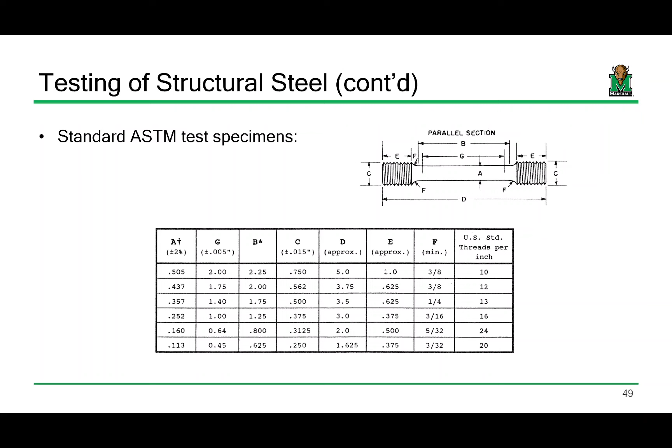Why are they called a 505? Because their diameter is 0.505 inches. So we have its diameter, we have its gauge length, which is 2 inches, and all of the associated dimensions and whatnot. What we're going to do is take that data and resolve it into a stress-strain curve.

I think you all probably know how to do that conceptually, but I actually want to give you some real data, and we are going to analyze it together. That's what we'll do Tuesday in class.

So what do I want you to bring Tuesday? I want you to bring your laptops. What I'm going to do is have the data posted to Blackboard, and we'll come in and process it together.

Does that make sense? I know that was a content-heavy lecture, I know, but I think it was a lot of good stuff. That's all I got, everybody.